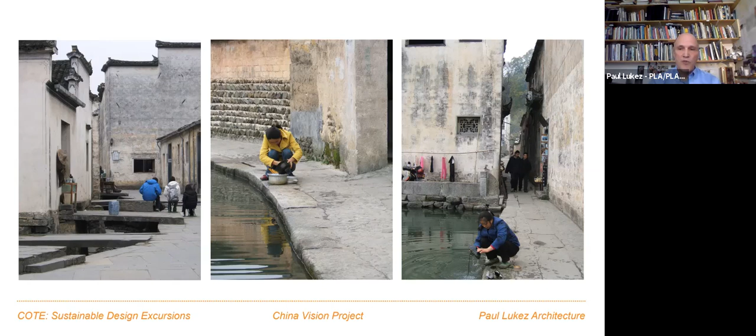Here's an example of how flowing water is used throughout the town. Noteworthy are the simple, elegant slabs of local stone that become bridges crossing the waterways as they cut through the town. Besides defining a private entrance to the house, the black stone also serves a utilitarian purpose: the bridges and seats are used to dry vegetables, even laundry, and they're especially effective on hot sunny days because the stone is black and absorbs the heat.

Many of the courtyard houses have their own courtyard pools where they raise fish. In fact, many of these houses are built on round stones so that the water can filter underneath the house, from house to house and courtyard to courtyard. All of these examples, and so many other places like Hong Kong, fed our imagination and provided us with a cultural appreciation of what our client wanted to achieve.

And that is to design a model for sustainable and healthy living. That was a tall order indeed.

Our site is located in Hangzhou, China. Hangzhou is a medium-sized city with about 10 million people in its metropolitan area. Its central area is about 4 to 6 million, and you'll get different numbers on that. It's very famous for its exquisite Xihu, or West Lake. You may also know it as the center of Alibaba. Our site is located 2 miles north of the lake.

The actual site was part of a larger university campus, which was being demolished as we were visiting there one day. As you can see, there's no concern here about OSHA regulations. We came out of the site with dust on our suit jackets from the explosions and the dust. But you can also see how the roof tiles and floor tiles are neatly stacked right after the demolition happens, and these are then used for recycling purposes.

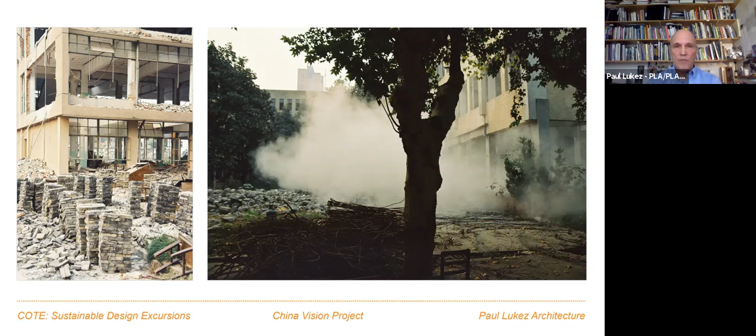As you'll see, we were also contemplating and proposing to use some of these tiles and slates as part of our proposed design and elevation. But one of the first things our clients asked us to do was prepare a research document on sustainable concepts and technologies. So when we returned from our first trip to the site, we spent 6 weeks developing a 300-page binder with lots of references related to precedents and resources. They were particularly interested in different kinds of products and new technologies which might be showcased in this building.

We then returned to China, where we met with Jindu's team and shared with them the results of our research over the course of 4 days. Here we are with Brooks and Jue. It was kind of a compressed seminar that provided the developer with lots of information about possible design strategies. They gave us immediate feedback about things they wanted to include, creating in the process what effectively could be considered a basis of design document. It also helped establish this very strong bonded relationship with our clients.

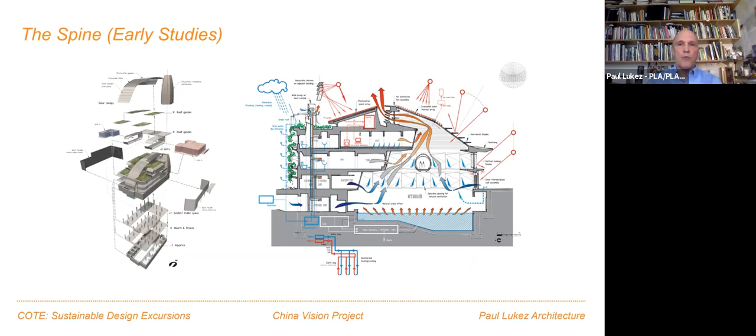From there, we took an immediate deep dive into developing 3 schematic design proposals. One of them was called the Spine and included a subterranean pool. Now, these drawings are done by Ben Graham, a very talented designer who was working with us at the time and who is now residing in Oregon.

The clients loved the facade studies, which are almost Aaltoesque in their rhythm and delineation. But the clients also wanted something that was a little less grotto-like as it related to the pool.

This led to this sketch, which thought of the pool as being more like a vessel, such that the pool and the water are celebrated and elevated to a higher level. This is inspired in part by the extraordinary elegant vessels that I saw when I was taking a side trip to Xi'an and saw the museum there where they were exhibiting these kinds of vessels, some of them 5,000 years old. Typically they would consist of very simple bowl-like or vessel forms supported by 3, 4, or 5 legs, all of which were in different profiles and proportions.

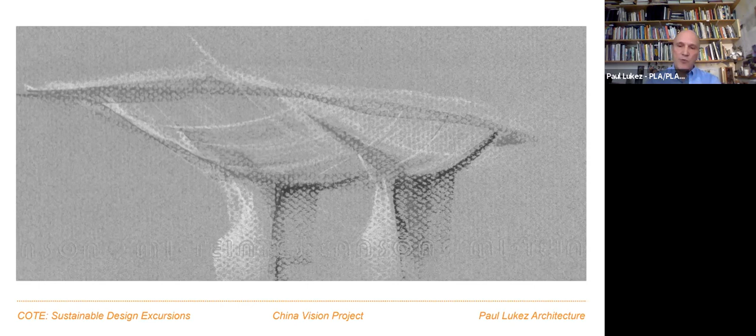Back in Hangzhou, one evening, Brooks and I were working on sketches that pretty much defined the concept in the diagram. Mind you, we were doing this in the middle of their New Year celebration. We were in a high rise and fireworks were going off all around us, such that one would have thought we were in downtown Beirut.

Here are some of the sketches that describe some of our ideas, including elevating the pool and containing the vessel of the water and all the uses within a strictly defined perimeter and volume dictated by the developer in the city.

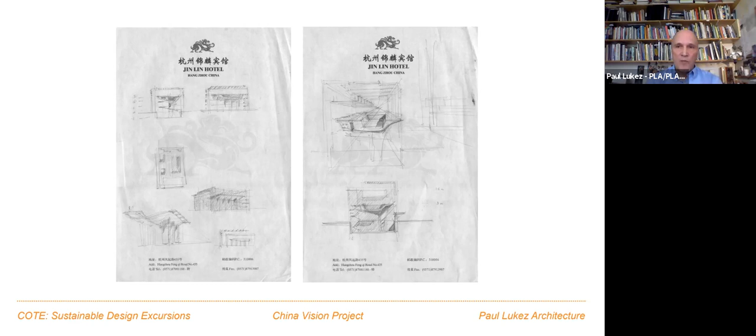And this is a pivotal sketch that was done in Hangzhou in that hotel, and it shows a longitudinal section of the pool contained within the volume of the building, allowed by zoning and site parameters. It's designed also to capture more space by using some of the subterranean levels for mechanical rooms and other support spaces.

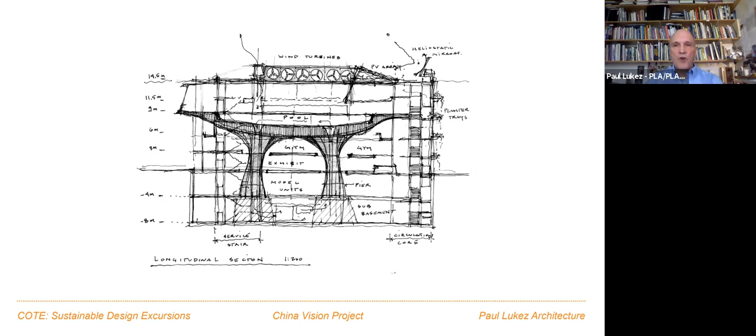Back in Boston, then we refined the design and the diagram. Most of this work was done in physical model and in Rhino. This is a translation of that diagram into a section, demonstrating some of the sustainable principles, especially as it relates to ventilation. There was also this kind of crazy idea for how we might heat the pool by utilizing excess energy generated by a factory down the road. We had seen this strategy used in other parts of China, where sometimes insulated pipes are used to transfer heat from a plant or from one building to another across the landscape.

Now, the west wall used a heavily vegetated wall of hanging plants, which is also used to help capture water. These hanging gardens also help shade the west interior spaces while filtering beautiful light into the pavilion space proper.

Here you can see an exploded diagram showing the key components of the design. I want you to take special notice of the running track that follows the perimeter of the interior of the space, located just underneath the pool. So that as one is running along the track, you get different vistas of all the uses on the inside of the building, as well as being able to see the entry court, which we'll be talking about later. This is an idea actually developed by an intern who had been visiting us from Wellesley one summer.

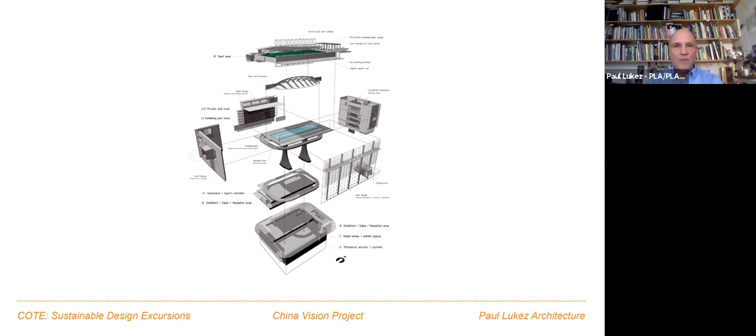Please note that we took these drawings only to design development level. This is common in China, because at that point the drawings are turned over to what's called a local design institute. These are large corporations with hundreds of architects, sometimes thousands of architects, that then turn your drawings into local construction drawings.

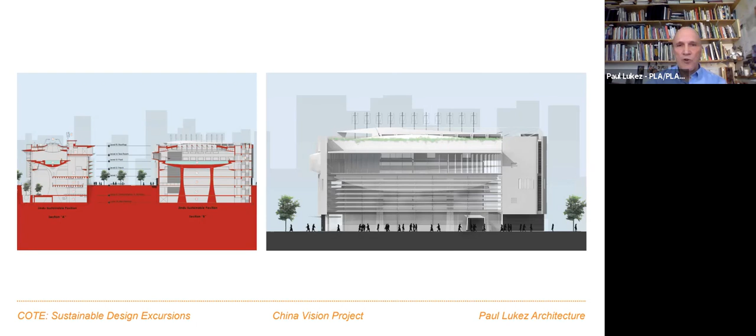It was great to be able to come back to Hangzhou during the process and to see the model of the pavilion and the project site. On your left, you can see the entry court designed by C2 Landscape, who were in Boston at the time and now in Fort Collins, Colorado. They did the entry design and the court and landscape work.

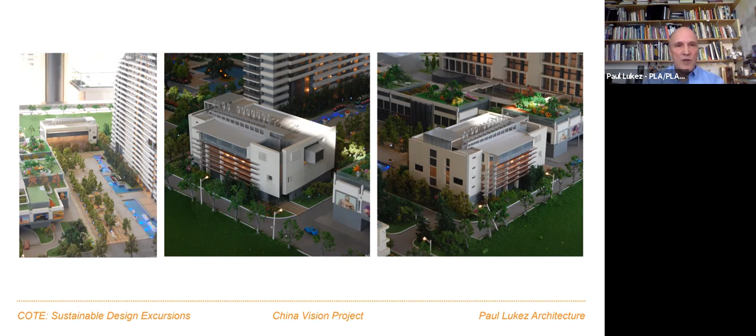These images also give you a sense of the context of the housing towers and other buildings. In fact, this was the first time we got to see the design of the adjacent buildings, which would include a school, a kindergarten, a shopping center, and offices. The taller structures there are about half of the towers, and the towers are about twice as high as what you can see on the screen.

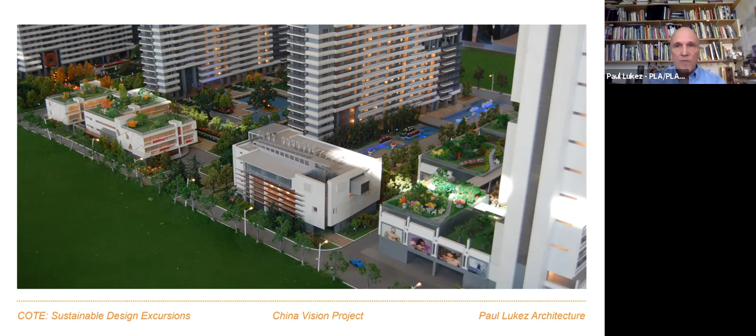And here you get a better view of the western facade, where the trays are for the hanging gardens.

Now, these drawings also share with you our working process, which includes working over 3D model images, as well as working in 3D models, doing so in an iterative fashion. Sometimes, like the drawing on the left, it's a pencil drawing executed by 2 or 3 people, overlaying other drawings one upon the other, and sometimes yielding interesting and accidental results.

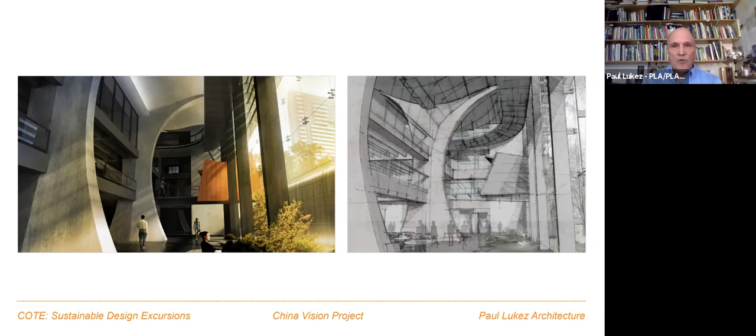Now, these drawings are of the pool, and imagine, if you will, doing a backstroke at night, looking up through the skylights at the sky and seeing the stars. The hand drawing on the left was done in part by Ben Graham, and the model rendering was done by Kazhou Chen and Alex Hograve again, both of whom were working with us at the time.

So we had also a chance to see the project during construction. Here I am with Chris Sarek, a member of our team, and it was a very hot summer day, some 95 degrees. Yet we found ourselves very comfortably cool thanks to the natural ventilation. We could really see that the air was moving through the spaces and cooling us as we had hoped it would. The formwork had just been taken off on the underside of the belly of the vessel, as you can see. It was about to be cleaned.

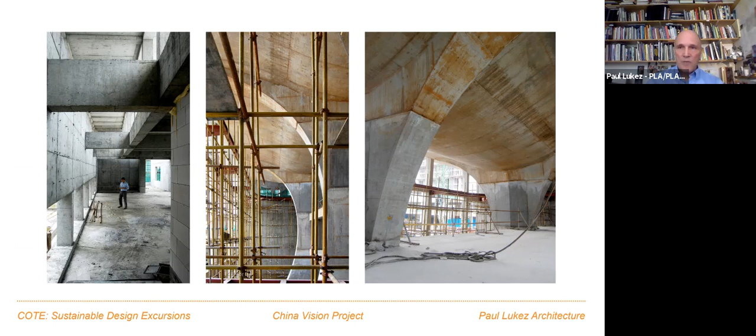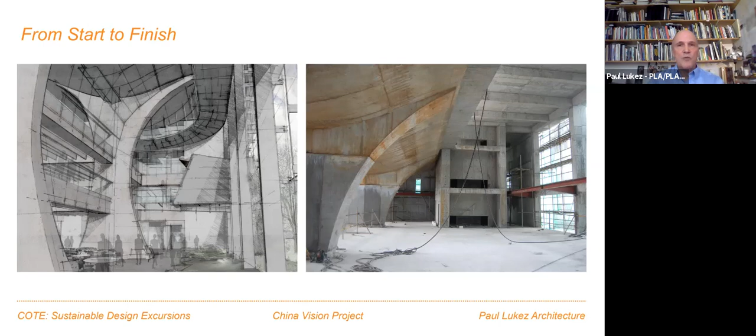Unfortunately, that was the last time we saw that project, because the property changed hands in management control. Consequently, the full ambitions of the original CEO were not carried out, much to our disappointment. However, the project is now being used as a gym and spa, and it still plays an important role in this complex.

As always, we're very grateful to all the people that contribute and help in these projects. They're all very much a collaborative effort. So big thanks to my partners on this, Ju Zahn and Brooks Mostu, and our design team, and many of those I haven't mentioned, as well as our consultants.

Now, the next project is also in China and for the same client. When we finished that project, they asked us to take a look at this other one, in a different city on a site that had yet to be created. The purpose of this project was to develop a master plan for a reclaimed site in the Bay of Xiamen in Fujian province. But it's also an opportunity to explore architectural ideas, particularly as they relate to sustainable strategies. The project was to include somewhere between 11 and 12 towers, with a program for housing, hotels, and other mixed uses.

Now, Xiamen is a remarkable island city in southern China. It's a historic city of some 4 million people and was supposed to have been visited by Marco Polo. The larger Bay of Xiamen is populated with a number of other islands. As the islands in the city run out of space to grow, land is being reclaimed along the edges of the bay.

Our site is just north of the city island on this reclaimed, or to-be-reclaimed, land. Now, the province of Fujian is also famous for the Hakka people and their impressive tulou structures. These square and circular structures house families and livestock and represent a unique communal form. This is just outside of Xiamen, more in the mountains to the west. This form and the appeal of celebrating community was a strong influence on our design.

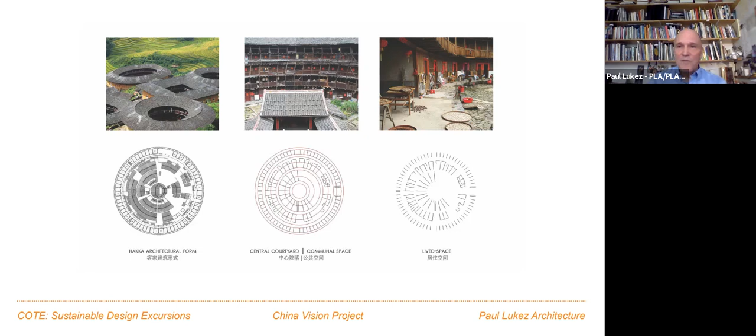We were also impressed by the beautiful rock formations found in the island's lush park, evident in many parts of the island area where you would see these kinds of rock outcroppings. The chiseled rock formations were also a source of inspiration for our team and informed the formal language, as you'll see.

We also enjoyed spending time exploring this very special island called Gulangyu in Xiamen Bay. It's right across from the main city, the main island city. The island served as an international treaty port run by the British from 1842 to 1902. Its architecture is a unique blend of local and European influences, responding to a very hot and humid climate. Imagine something like Savannah, Georgia in the summer.

These are two examples of the types of buildings one would find on this island. This one is wrapped generously by porches that are typical of the island's architecture. The in-between space offered by the porch helps temper the impact of the hot and humid climate on the residents. In addition, the island's lush vegetation provides lots of shade while catching cool ocean breezes.

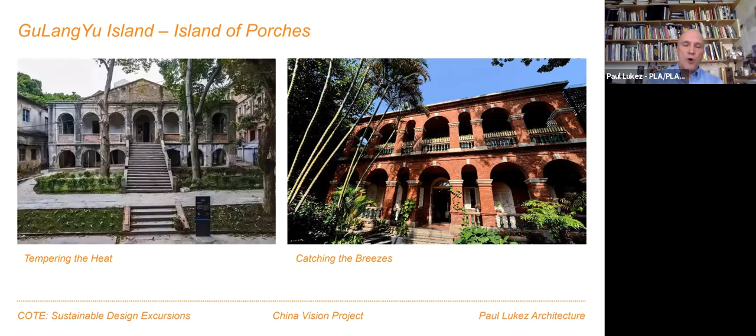And this stuff really works. When you're walking through this island, you'll feel the cool breezes as you move through different parts of the pathways, streets, or under the cover of the porches. So we tried to incorporate this idea into our design of the tower's building envelope.

A porch-like screen made of solar panels helps to shade residents' gardens and balconies. In addition, the balconies have integrated operable vents in their floors, allowing air to move up the entire facade, air that is then cooled and filtered by the vegetated balconies. The living spaces have another layer of operable shading devices to control light and heat.

We also explored the ideas of integrating wind turbines in the outer corners of the building and looked at optimal profiles for where they might be located relative to the form of the towers.

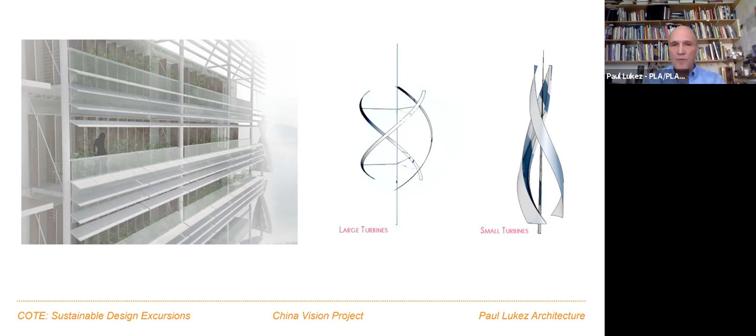We also explored ways of sculpting the floor plates and using fin profiles for cooling the building itself, much like a hot engine block on a motorcycle, which is air cooled. Because of the way the fins are designed, it helps them heat-dissipate the mass of the engine block itself.

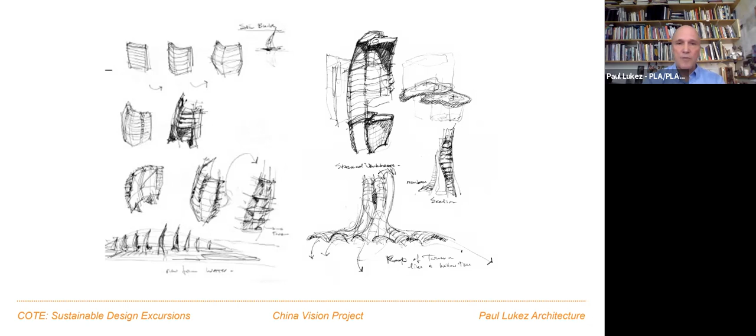This section of the tower base, the buildings, and the sea illustrates how cooling can be promoted. Sea breezes from the ocean are captured and further cooled under the shaded spaces of the lower 2- and 3-story base buildings. Then they move up and rise through the tower in their envelopes and help cool the interior spaces.

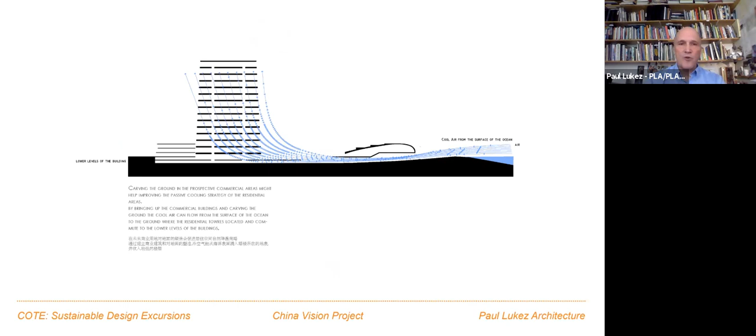These two sections illustrate how this concept was further developed through the design development stages, which again is as far as we took this project. So this is kind of a unique project because, while it was a master plan, it still had this strong architectural component to it.

We also wanted to develop profiles for towers that worked well in capturing sun and light while optimizing the building volume. These profiles were developed by Masoud Akbarzadeh, who is now teaching at UPenn. He also studied forms that could integrate turbines, either centrally located within the volume of the tower or on the perimeter where there is higher airflow movement.

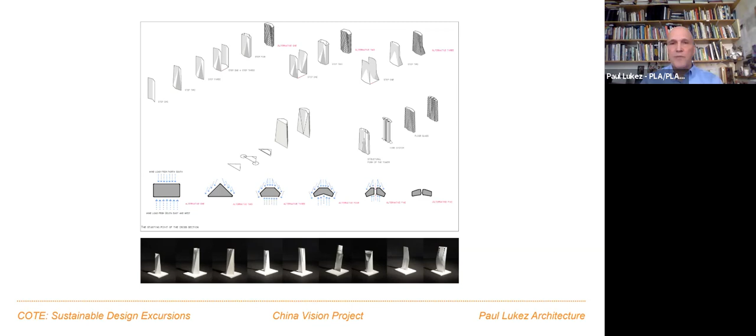These individual tower types were then deployed on site models, with the one at the bottom being closest to the final design.

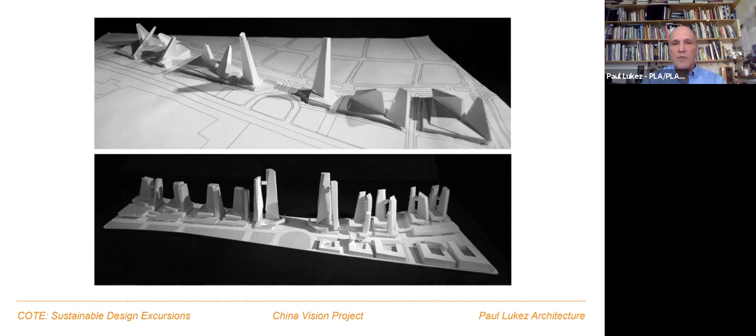This model shot illustrates how several of the design concepts came to fruition, including two hotel towers whose forms are again inspired by the rock formations, the base building that took on the structural form of the tulou structures, and the layered porch concept, which was designed to encourage natural ventilation.

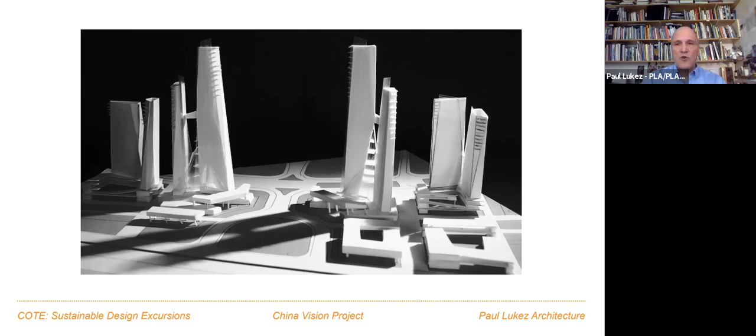Here we have a close-up of the 2 hotel towers clad in that porch-like skin, again showing that chiseled look to the volume of the buildings.

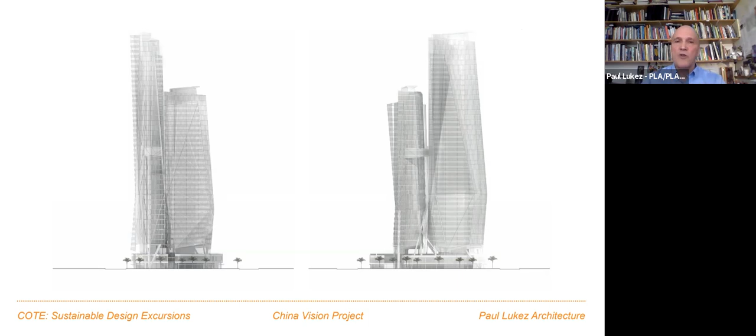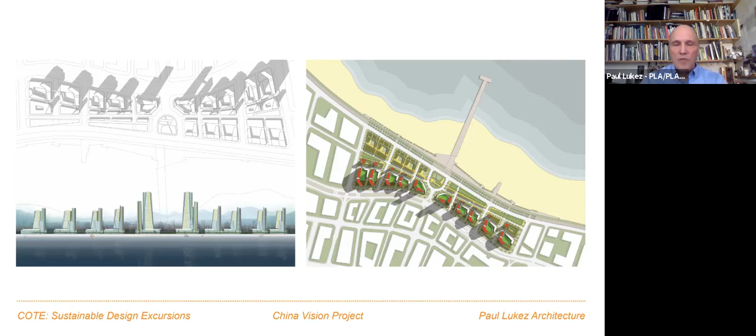In the final plan, what happens then has to be tested in a special software package that the government has. It has to make sure that each of the living spaces receives at least 2 hours of natural daylight throughout all the seasons.

The good news was that we designed past this standard. It's not an easy thing to do because the developers and clients are pushing very hard to maximize building volume, and there's lots of restrictions on where you can put the buildings, setbacks, etc.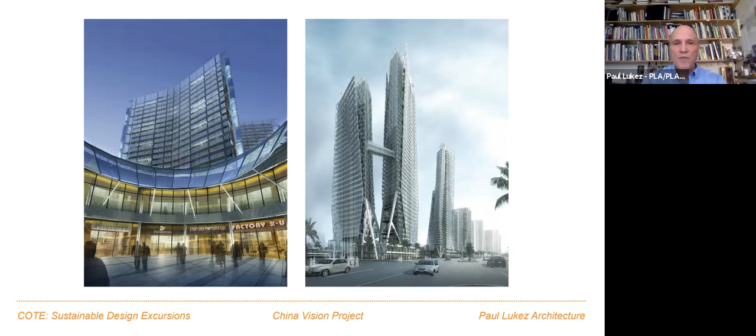As always, we want to thank the many talented collaborators who worked on this project. We had a very talented team indeed.

Some of these things are designed and executed in very fast time periods. Typically clients, even if you do it in a 2 or 3 or 6 month period, which would be fast for any kind of project, they still are wondering what's taking so long.

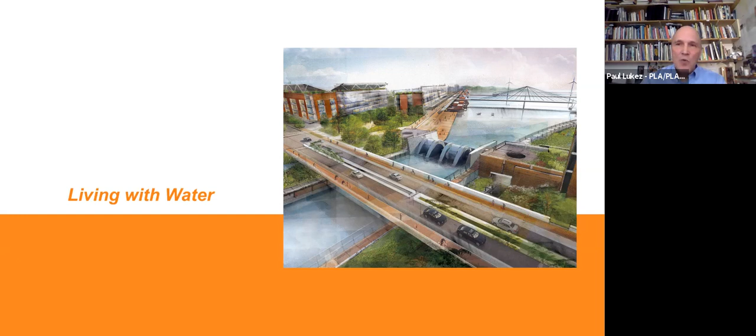So this third project is closer to home and is on Columbia Point, in fact. This offered us an opportunity to work on projects of the scale we did in China while incorporating lessons learned from past projects.

In 2015 and 16, there was an international competition called Living with Water, announced and sponsored by the BSA, the then BRA, and the USGBC. Of course, we couldn't resist the opportunity to participate.

More globally speaking, this competition was calling for designers to address the pressing challenges that rising sea levels and climate change was causing. In the not so distant rear view of history at that time was the memory of Hurricane Katrina and Hurricane Sandy, both of which had caused billions of dollars of damage and environmental, societal, and economic havoc.

The competition used 3 local sites in Boston as a way of testing ideas to combat rising tides. This is becoming increasingly obvious in Boston, especially in places like Long Wharf, where during king tide days you can see water actually lapping over onto the surface of Long Wharf itself.

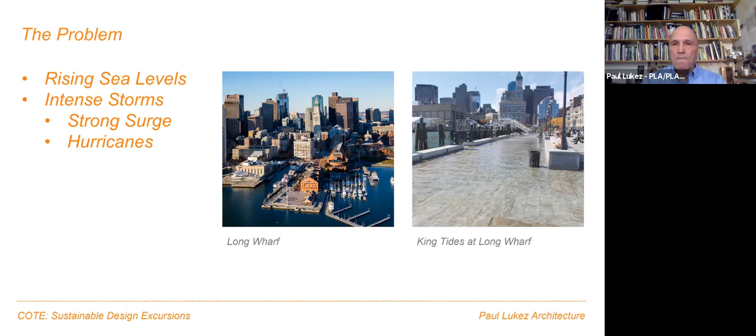One could argue that Boston has been living with water since its inception. The symbiotic relationship between water access and habitable land has been an operative driver of design for centuries. But that relationship is increasingly threatened by climate change.

These well-known evolutionary cartographies featured in Mapping Boston tell the story of Boston's topographic transformation. When laid side by side with projected flooding patterns circa 2050, we can also see a strong correlation between those areas where there was fill and the areas prone to be flooded in the future.

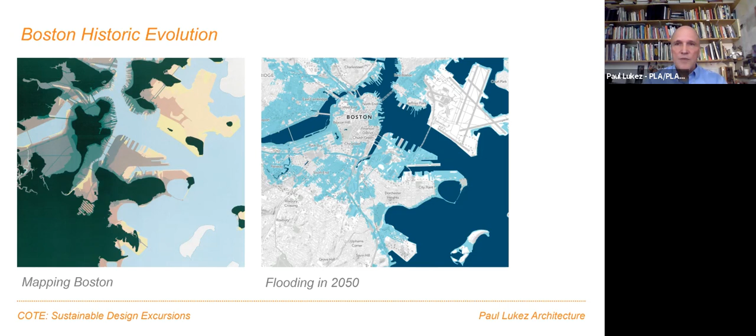Given the inevitability of this foreboding danger, we thought to pursue 4 sets of goals. These included, first, to protect the community by managing the water. Second, to harness renewable energy where possible. Third, to create public spaces. And fourth, to integrate infrastructure, urbanism, landscape, and the renewable energy.

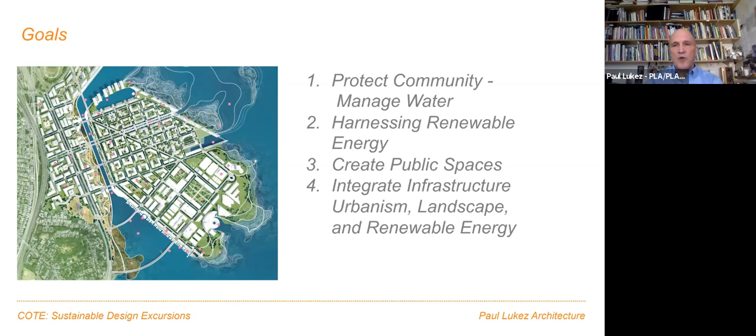While we don't have time to delve as deeply into this project as a 250-page document that described all its different attributes and design ideas, I want to focus on a key concept that was developed: cutting a canal through the site, which we call the Hydroelectric Canal.

This allows infrastructure to play a dual role, protecting habitable land while generating renewable energy. This idea is not new and was borrowed from a local source. Some 300 years ago, Mill Creek was connected to Mill Pond, a tidal basin, which was connected with Boston Harbor.

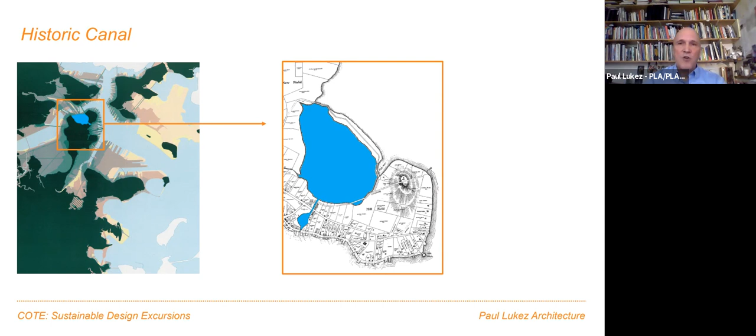The mills along Mill Creek were powered by the changing tidal levels between Mill Pond and the harbor. Our proposal is to cut a canal through the site running parallel to Morrissey Boulevard, much like Mill Creek did, but much larger.

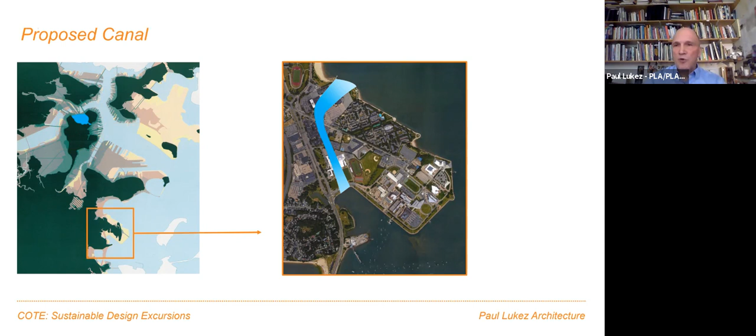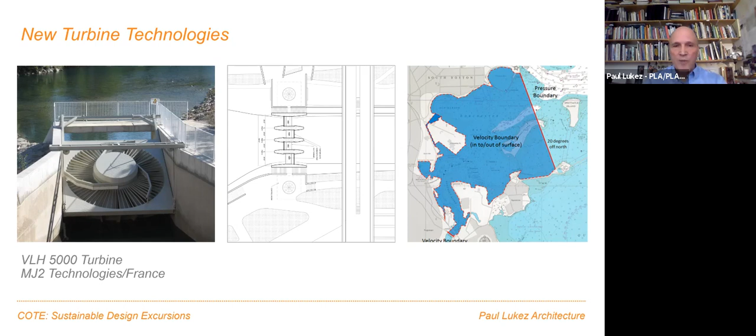This slide shows how the turbine can be anchored to concrete barrages or supports at both ends of the canal.

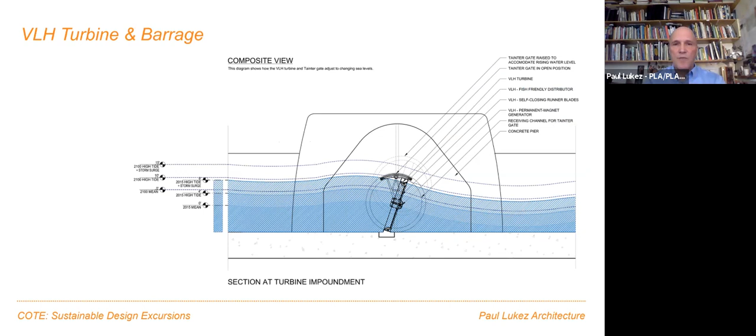We asked Arup's office in New York to make sure there was enough velocity generated in the canal so the turbine would actually operate and be active. They did a CFD, computational fluid dynamic analysis, and determined there was enough velocity in the water, about 0.26 meters per second, to generate power for this particular turbine.

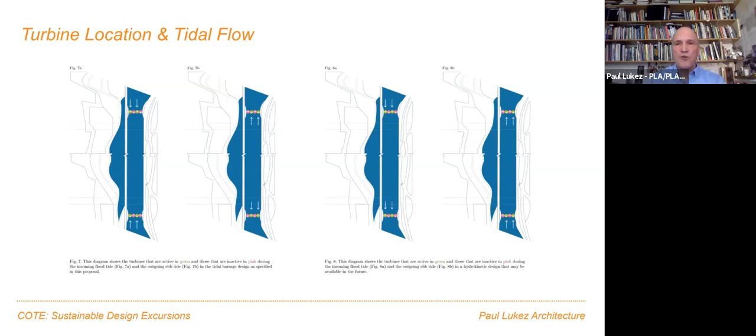There were 2 sets of these turbines, and this diagram shows how the canal functions and the location of the turbines at either end. It also illustrates how the canal and its adjacent lands have the capacity to store excess water from high or higher tides, and even storm surges, if such an event were to happen.

One can calculate the potential energy generated by the canal based on the volume of water and its velocity. We did a number of these calculations, and it looked promising.

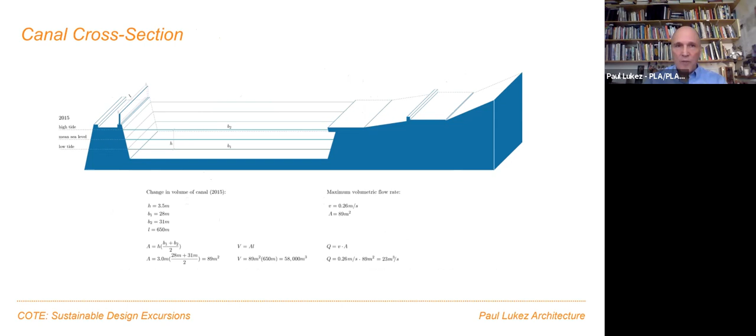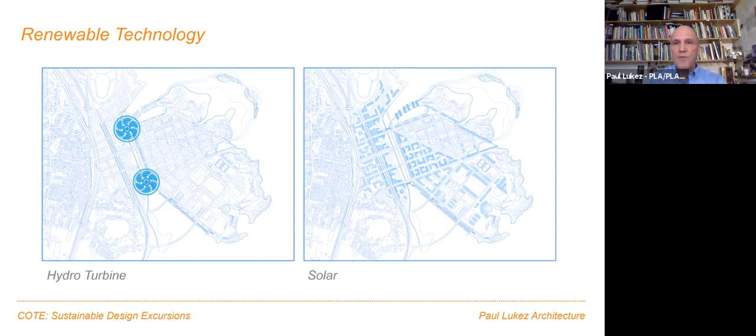But this scheme doesn't rely exclusively on hydropower; it's also powered by solar, such that each of the housing blocks would include solar energy. In addition, geothermal would be applied where possible. Wind is less likely due to the proximity of the airport and air traffic patterns.

Some strategies used to make this area more resilient are based on using the full range of building and landscape typologies, and we'll show you two of those. A key typology is based on creating a modular urban block, or what we call the building quad typology. Each block would be self-sustaining and resilient, such that it was net zero energy while managing water and flooding conditions.

For instance, in the event of a storm, each of the quad's courtyards could be flooded to capture and contain stormwater.

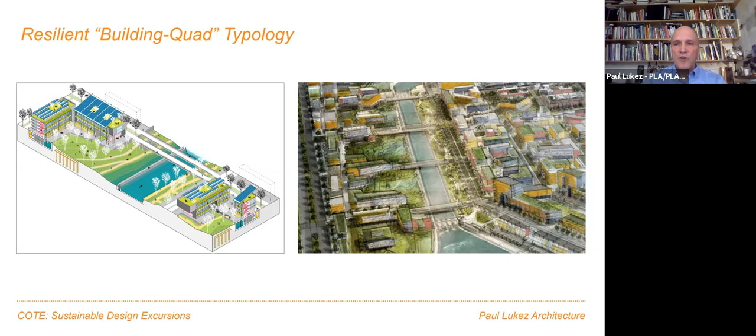The idea is that we can build more resilient neighborhoods if we build resiliency into each block and each building. And this can affect how we think about the development process.

The size, orientation, and final design of each block would be built by different sets of developers and designers, generating the kind of richness and variety we find in places like the South End and Back Bay today, which in fact use a very similar process.

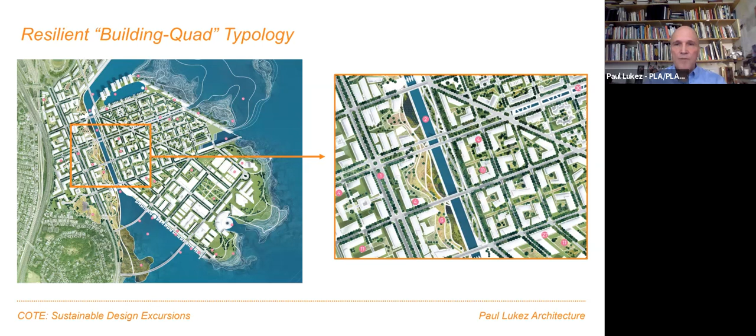Another typology is the landform typology. These typologies are part building, part landform, but help add resiliency to the outer edges of Columbia Point.

It's also possible to offer great resilience and opportunities for UMass to grow by using floating architecture, which can be docked and tethered to the landform typologies. Like a metabolist dream, the harbor can be filled with floating classrooms, offices, and other academic uses.

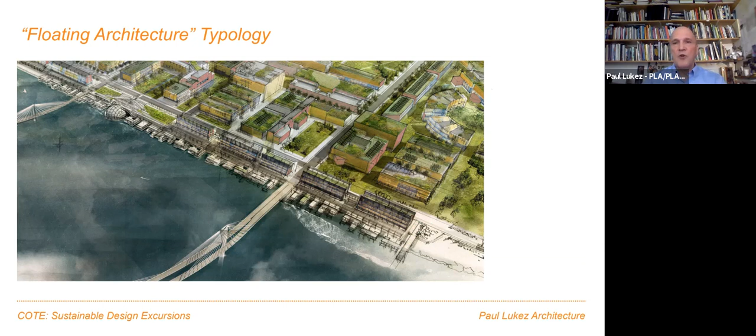The result of deploying these typologies and other features we have not discussed is what we hope looks like a transformed neighborhood, one that looks like it's very much part of Boston's evolving texture and identity.

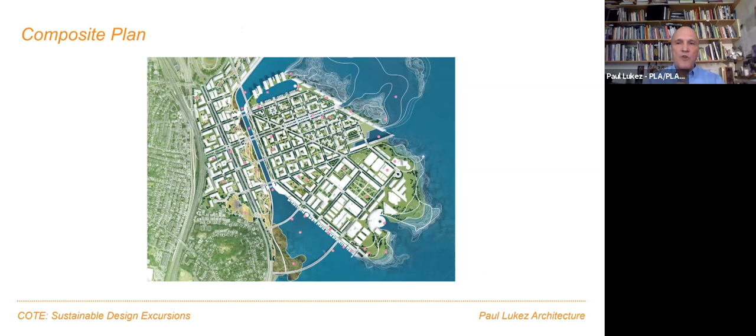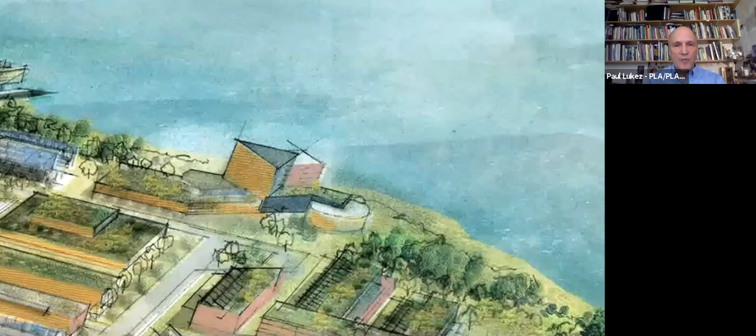Now, this short animation highlights some of the design strategies that we shared with you today. Here we can see the hydroelectric canal, and on the left of the canal you can see areas where land or water can be contained if necessary. Then you can see the transition to these landform typologies as we bend the corner around the John F. Kennedy Library and turn towards a transformed, more resilient UMass campus and a transformed landscape that can help buffer and manage rising tides more effectively.

Finally, we see some of the floating architecture, again anchored and tethered to these landforms. In this particular view, the hydroelectric canal shows how parks on the west side of the canal can collect the excess water during a major event, and at the far end of the canal we can see where there's the four VLH turbines.

This animation illustrates the landform typologies and the floating architecture that is anchored to it, as well as the gateway to the canal, which we'll see shortly. So this is an opportunity to celebrate infrastructure and integrate it with the development process.

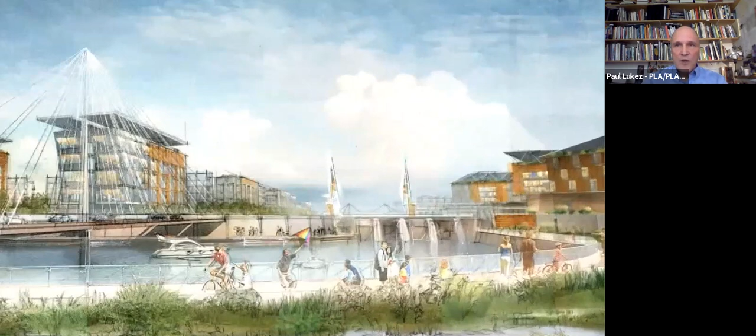And this last vignette here shows the north end of the canal. It shows how the parklands and a network of walkways and bike paths and spaces can be connected to an already pre-existing network in South Boston and neighboring communities.

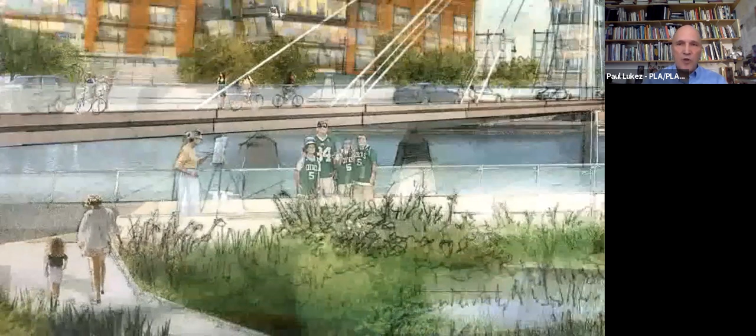And this also included a lot of conversations with people in the hydro technology area. It was amazing how willing and interested people were to contribute their expertise and their ideas to this project.

Now, this last project is far more modest in scale, but it's meant to be prototypical and provides a scalable model for net zero energy living. At the end of this presentation, I'll also be showing you a short 5-minute video about the house that we did as part of the Boston Magazine feature on three houses of the future. This came out, I guess, back in February, March.

While the video provides an overview of the project, I thought we could take these next five minutes to talk about some of the more technical aspects of the house and introduce you to it. The house was completed for a recently retired couple, both of whom are academics, and the program is very compact and along the lines of Sarah Susanka's Not So Big House thinking, with a living area of just around 2,000 square feet.

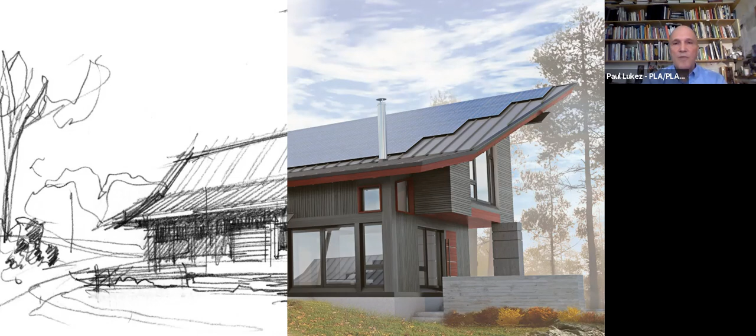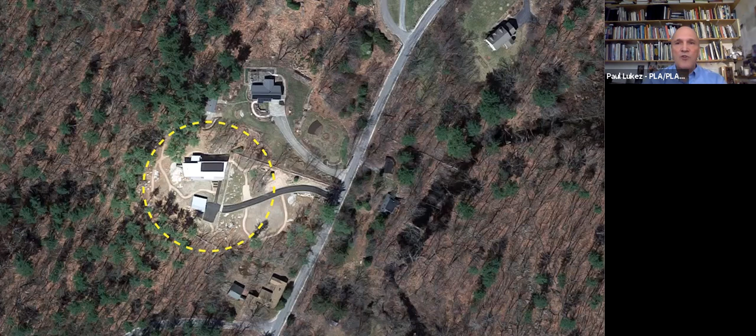Now, the project, like most of our projects, evolves three-dimensionally from inception throughout design. It's located in Harvard, Mass, on a 2.5-acre site, a beautiful site. The house had to manage some very challenging site constraints and conditions, including dealing with challenging setback requirements and providing suitable access to the one place that there was a buildable part to the site, given the amount of ledge that existed on site.

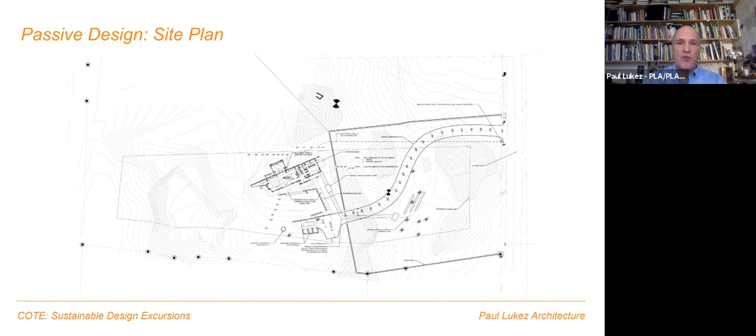Then the location of the house also had to be carefully balanced with the water sources and the location of the septic system, so you can see how we got squeezed here. So working with Derek Brain of Soulworks, we were able to locate the best place on the site based on solar exposure, using a solar path finder. We go around the site with this Pathfinder and confirm our assumptions about what we thought would be the best location for the house.

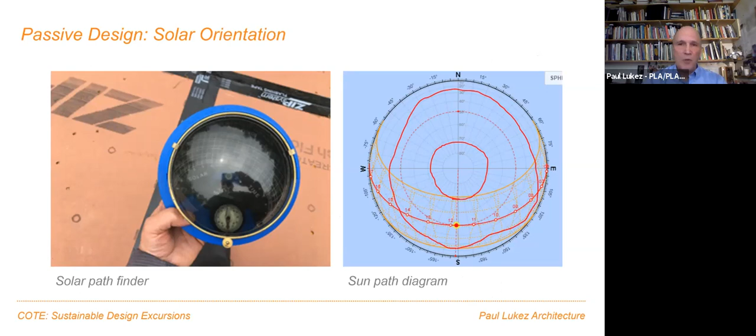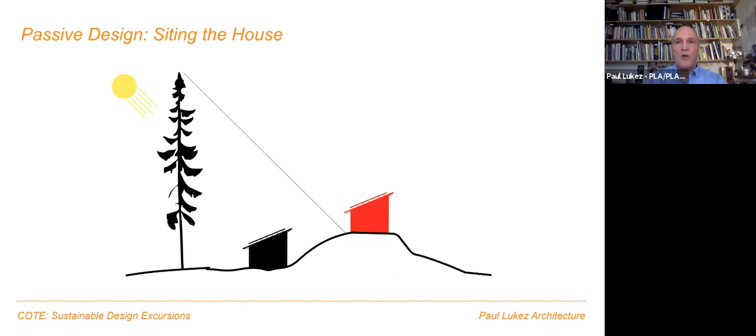This also had to be taken into account as it relates to elevation and how shadows cast by trees could impact the performance of the building. In the end, we located the house on one of the higher points of the site. The design of the roof and the panels became a major driver for the design of the house. This had to be balanced with the design of the interior space and the volume, that is, getting the house and its volume to be the right size. Of course, roof overhangs also played an important part in providing summer shade and what became a very distinctive roofline.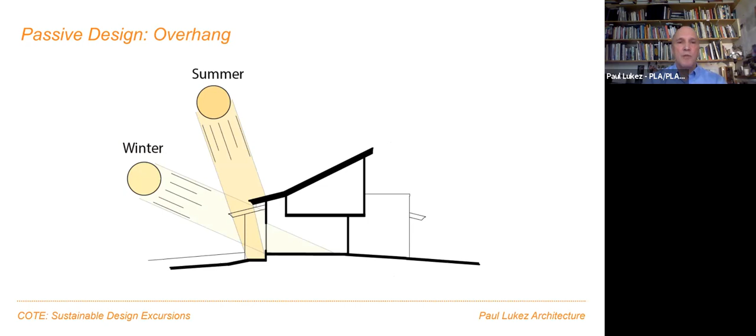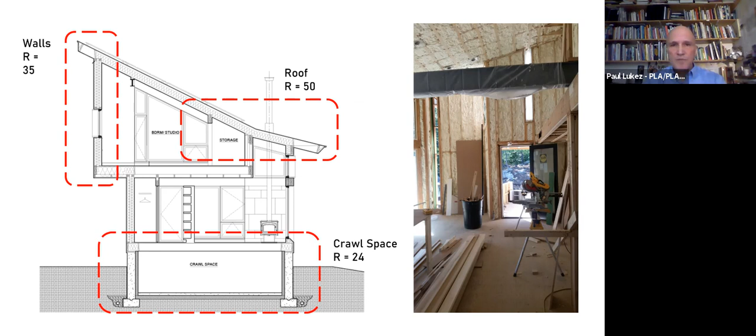We tried to develop a really tight building envelope. All the walls are 12 inches thick, with an R value of 35, and the roof has an R value of 50. Of course, the crawl space is also insulated. We also used triple glazed Pella windows, which I think offer great value for their performance.

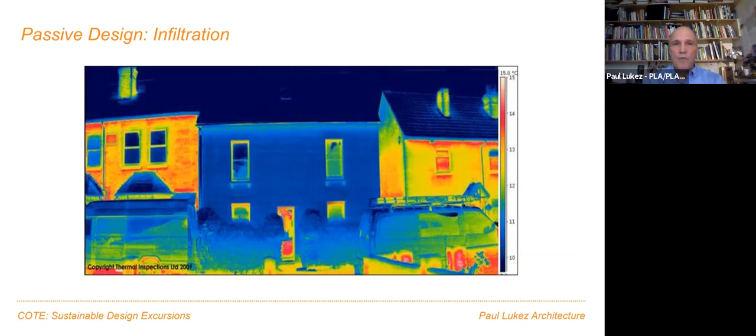Thinking about window location is paramount in making sure we minimize the amount of windows on the north side of the house while opening up views to the south.

I have to confess, we did use some steel, and justified it by saving building height and cost in the process. The truth is that we really like the look of the steel in this project.

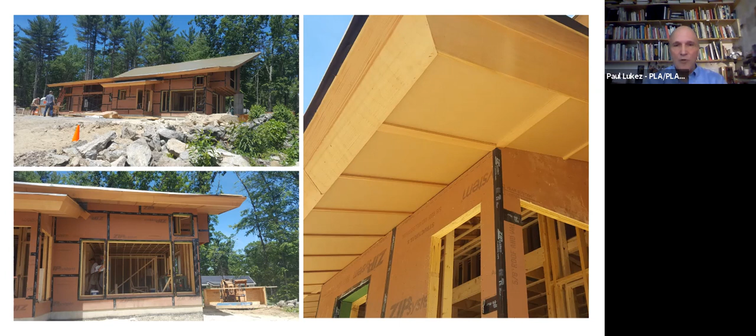Now, the general contractor, George and Keith Donahue, brought a wonderful sense of craft to the making of this house throughout the process, and they were richly rewarded. Every Wednesday when we had a site meeting, the client would bring giant boxes of pizza for the entire crew, and they were very appreciative of that indeed.

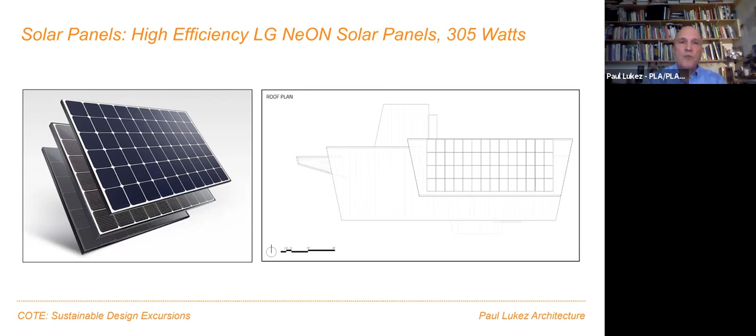SolWorks did all the design work for the solar panels, and we used 56 panels by LG, producing about 305 watts. We also used 2 batteries manufactured by a company called Sonnen, which means sun or sunning. They're a German solar company, and they produce a beautiful product.

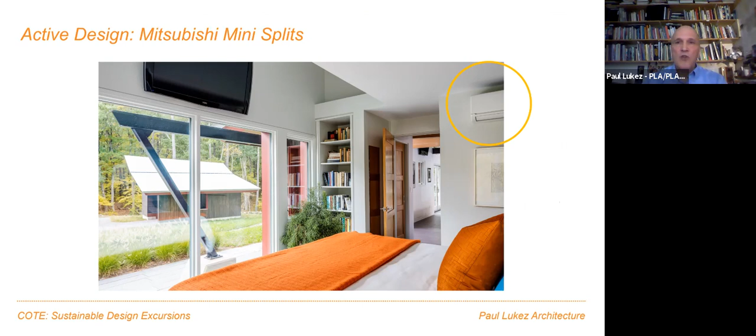Matt Bean of Norian Siani was our engineer, and he designed the MEP systems. We only needed 3 mini splits to condition the entire house, and of course there was an ERV tucked away. We also had supplementary heat if needed, but it was more of a decorative feature, only used once or twice a year in the most extreme, around -15 temperatures. There's also a fan by the company Big Ass, as in the donkey.

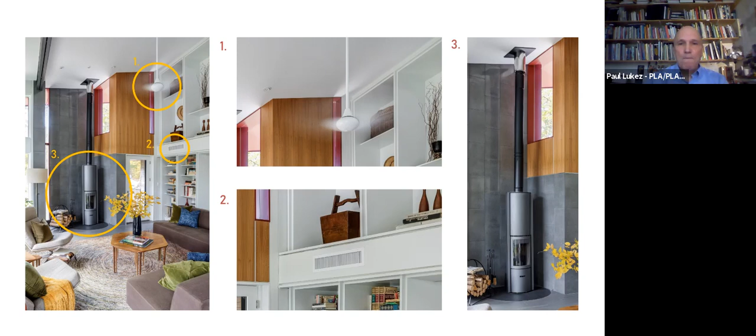Now, the house also supports the owner's mobility needs. The owner bought a Chevy Bolt, an electric vehicle, and the car drives just under 10,000 miles a year and uses about 3,500 kilowatt hours per year. So the house is designed such that the sun powers not only the house, but also the car. When you're driving the car down the street, you're driving off the power of the sun.

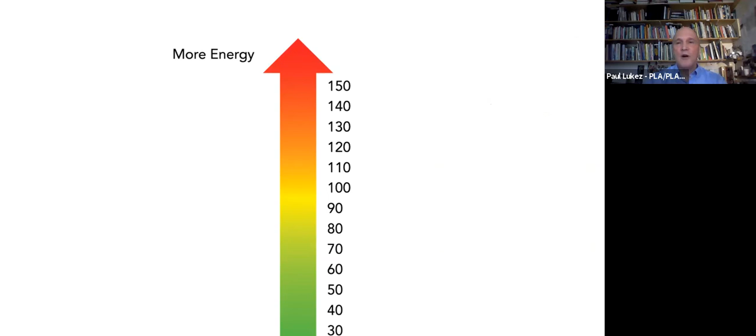The house has a HERS rating, home energy rating, of -23. A standard home has about 100. Existing homes typically have around 130, and we came in at -23, which makes it basically net positive. If you're at 0, then you're at net zero.

All of this was modeled by our engineers, solar designers, and our team, but the clients monitored the actual energy usage over the course of a year, their first year in the house. The results confirmed that the house, in fact, generated as much energy as a house and car required. The second year's performance was equally good, in line with the first year's.

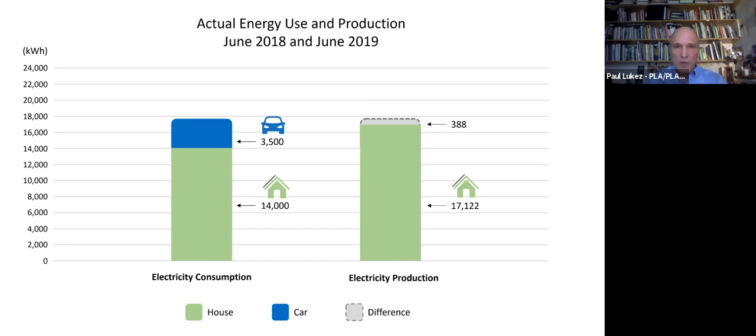By the way, we are finalizing a more technical paper that describes the house and its performance over the last 2 years. It should be ready on our website in about a month or two, and if people are interested, they can access it at that time.

Again, I wanted to thank everyone who worked on this house, the Jensen DeLue house, also referred to as the Rivendell house by the clients. What I'd like to do now is finish up by showing you a video of the Boston Home Magazine's 3 Houses of the Future.

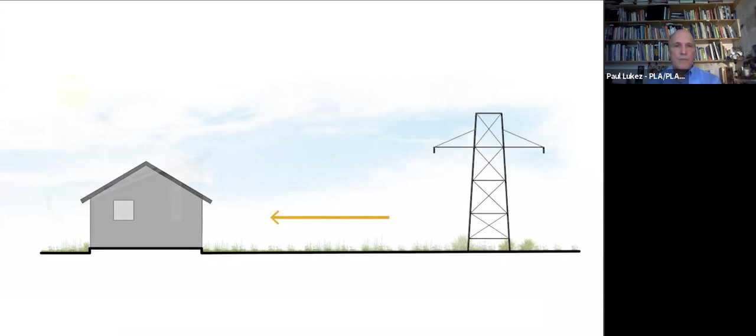Allow me to explain how the energy delivery matrix works today and how it can change over time. The typical house today gets its energy from the grid and gets supplementary energy either from oil or gas. Now with solar systems or renewable energy systems, your home can rely less on the grid and secondary carbon-based fuels. Plus, your monthly bill is bound to get reduced.

This system works even better if we introduce batteries. The batteries store excess energy and renewable energy for use during the evenings and on cloudy days. They also add a layer of resiliency to the house and the energy systems, especially during storms. Plus, the batteries look really cool.

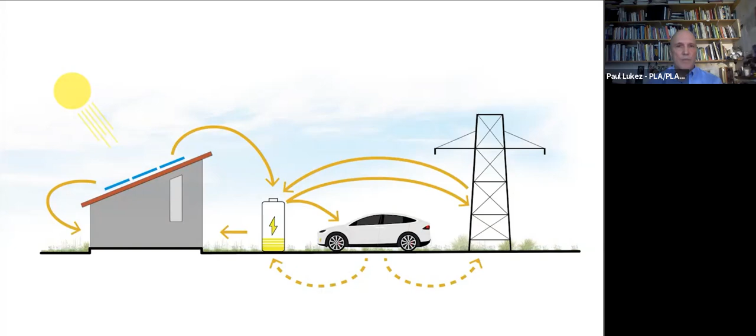Look at the battery by Sonnen, a German company that we used. Finally, we can add an electric car to the energy delivery system, such that the energy from the panels and the battery can be distributed to the electric vehicle. Adding batteries and EVs can also help increase the grid's storage capacity.

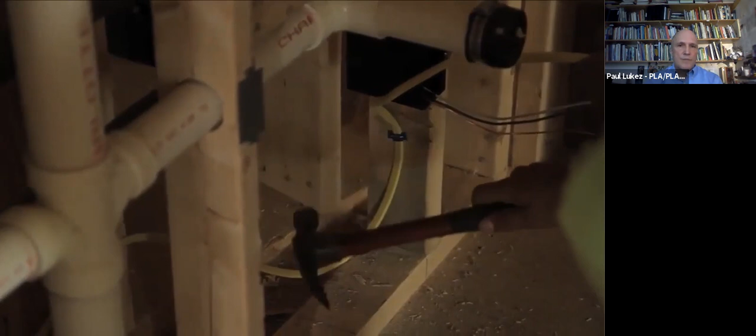The process for designing a house of this type is like designing a conventional home, with greater involvement with your engineering team early on in the process. Construction processes used in the house focused on creating a tight building envelope and making sure that as little energy as possible was lost through the building envelope itself. This requires a great contractor, which we were lucky to have in Donahue and Sons.

So what do you have to sacrifice in having a net zero energy house? If anything, we think net zero energy homes can create higher quality environments, as we hope to demonstrate in this abbreviated tour of the house.

The house is gently sited on a crest of a hill where the roof captures as much sun as possible. The old farm stone wall acts as a kind of threshold to the house and carport, which is located on the left. The entry to the house is marked by a lower entrance canopy and structure. The roof eaves are generously proportioned to provide summer shade on the south side of the house.

The living and dining room have taller ceilings and south-facing views of the lush landscape. A wood stove is only used on sub-zero days. The kitchen and dining room anchor the floor plan in the adjacent spaces. The mechanical room with the inverters and batteries is located above the kitchen.

The master bedroom is on the east side of the house, capturing the morning sun and overlooking stone walls and the towering pine trees. The carport provides shelter for the Chevy Bolt, an electric vehicle. It also serves as a kind of entry gateway, framing views of the landscape.

So in the end, what we find most fulfilling and rewarding is to see that our clients are happy with the project and that it has performed as anticipated. This would not be possible without the generous help and support of this project from our clients, Pat DeLue and Richard Jensen, and of course all the help and effort that went into designing and building this from our engineers, our contractors, and our consultants. Thank you.